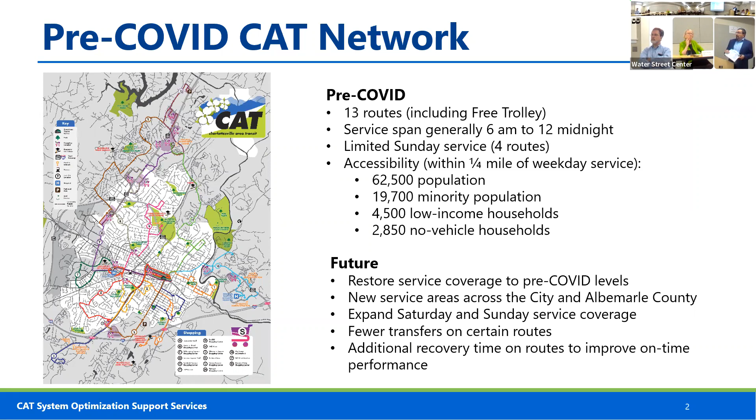So this kind of shows what that system optimization plan looked like, where we tried to improve service along the US 29 corridor, straighten some routes, make some routes more direct. We were proposing a new crosstown service and trying to beef up service on a number of corridors to 30 minutes or better, expand weekend service, and get some new service coverage, like some new areas in Albemarle County along Mill Creek Drive and into PVCC, as well as strengthened connections between UVA and the US 29 corridor. So that's kind of a high level of what the system optimization plan proposed.

Well, next we'll just kind of walk through the proposed phasing that we're looking at, since we can't do it all at once, but do it incrementally.

Sorry for the interruption, we had a comment that they're having a hard time hearing online, so we're moving the microphones closer. That's the mic, right. And I confirmed with B that they could see. I just want to make sure they could see. Can we put the AC on now?

I'm sorry, so does anyone have any questions? I just want to make sure as we go along that people don't have questions about what we're seeing right here, or are you going to go into more detail with the routes? Oh, you are.

That's good. And these are the same proposed network improvements that we saw 2 years ago. It's just we're talking about how to phase that. That is correct. But I'm having a hard time remembering, so we'll walk through it phase by phase and go through each round. Okay, that's great, thank you.

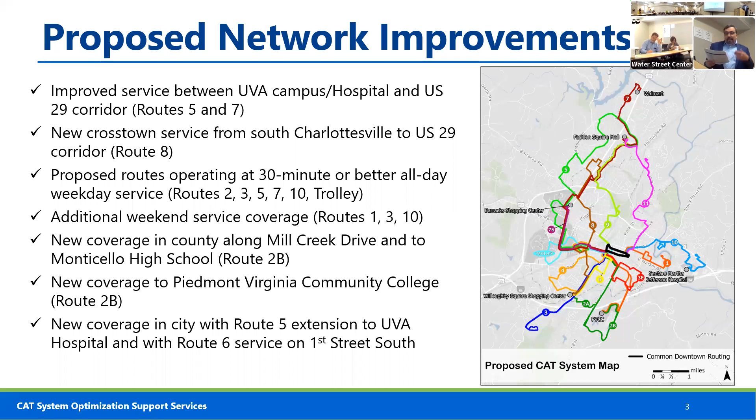Okay, so just on a system-wide basis here, next slide please.

The system optimization plan has had some modest gains in service coverage on weekdays and Saturdays, more so on Sundays. But what it was really accomplishing was improving accessibility at stops that had 30-minute or better service, getting that extra frequency so that service is more usable for riders there, as opposed to 60-minute routes.

I'll start with the phase 1 improvements, which we thought were the most pressing needs here. We're working with Garland and Joanne on this. For weekday and Saturday service, we were proposing to implement improvements on 3 routes: Route 11, to get service to the center on Rio Road; Route 6, to improve frequencies; and Route 2, to restructure service down at Avon Street. I'll talk through each of those individually.

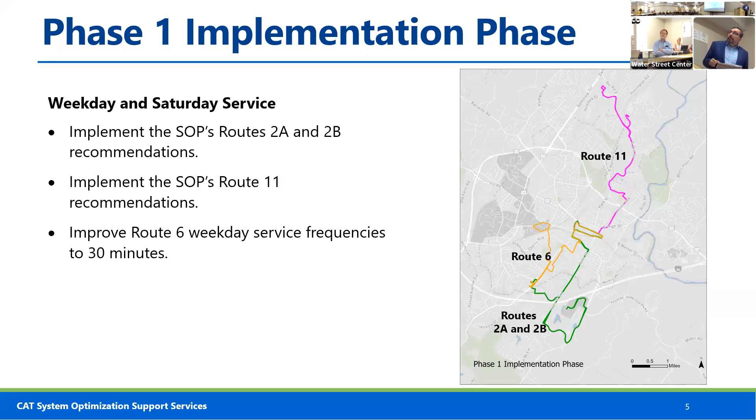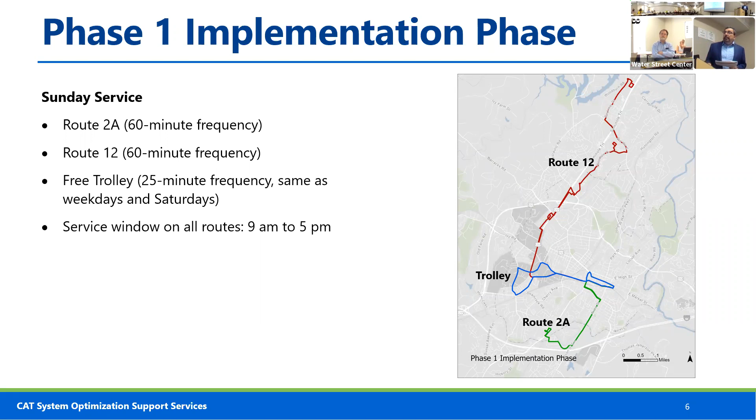Also, right now because of the pandemic and driver shortages, CAT is not able to run Sunday service. So we felt that was a pressing need to get some level of Sunday service back on the streets. We were proposing to get the trolley back online, the Route 12, which ran pre-pandemic on the US 29 corridor, and to get service down Avon Street past the CAT garage as well for Sunday service.

So a little bit about these 3 route improvements that are proposed.

For some of us that may not know exactly where the route numbers go... same old problem I have all the time. Just need—now that one clues me in because it says Willoughby Square. I just want to make sure people are aware of where the numbers actually go as we go through this.

Route 2 presently does a one-direction loop, a counterclockwise loop down 5th Street, back up Avon Street to downtown, cutting through the 5th Street station. What we propose is to make this 2-direction service, so it's more usable for people along Avon Street, and split the service with every other bus going either through 5th Street Station to Willoughby Square, or on down past the interstate along Mill Creek into PVCC. So two 60-minute patterns that combine to a 30-minute service along Avon Street.

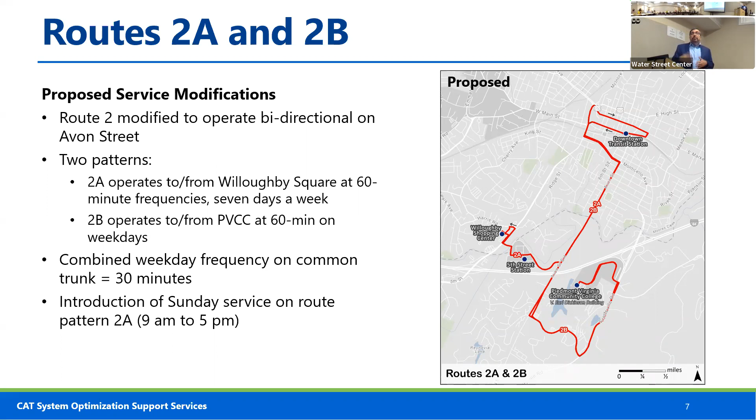That was one of the more pressing needs we wanted to make sure got included in phase 1. One of the major benefits is that going to PVCC allows us to get service to the high school. It's also helpful operationally for CAT because now you have 2-direction service on Avon Street going right by the facility, so when drivers are coming on to do an afternoon shift, they can catch the bus to do a relief here at the downtown transit center, improving their efficiency.

So that's one, and then the other big improvement was Route 11, which is really just a minor alignment adjustment. There's been a stated need to serve the center on Rio Road, so it's just getting that service to that center. To accommodate that, we had to take out a little loop along the alignment, but basically it's running like it is today, with that added service to Rio Road.

So if you guys have questions, please jump in. I just want to make sure, for the center—because I know Peter's been very concerned about the center—that southbound service still is not going to be possible. That's what I'm seeing there. That is correct.

That's one of his concerns. Now it's a safety issue, the buses not being able to turn left out—that's not a CAT issue, that's a safety concern. You can't go across an unsignalized intersection with 6 lanes of traffic. I was thinking about Peter since he's not here, because he's been very concerned about getting that service. And it wouldn't qualify for a traffic signal—according to VDOT, which is looking at this, it doesn't meet the warrants to allow for signalization because there are already 2 signals further down the line.

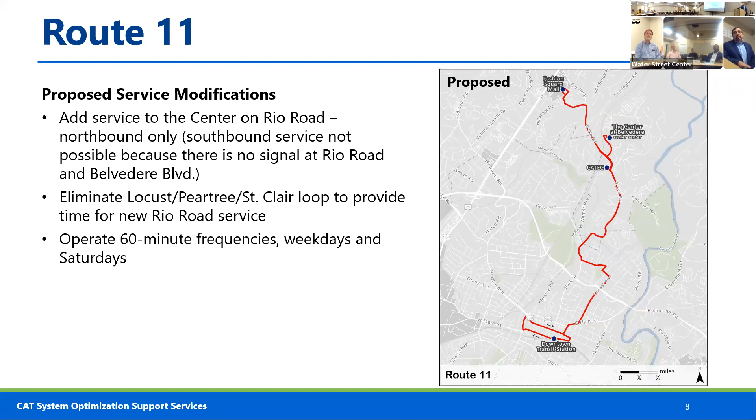There's one other improvement that's part of phase 1 that doesn't have an alignment change, so I didn't do a slide. That's Route 6, which goes from downtown to Willoughby Square by Crescent Hall. That route currently is at 60-minute frequencies, and we're proposing that as part of phase 1 it go to 30-minute frequencies as well. I know that's been a stated need for some time. So very modest improvements for phase 1 to accommodate — it's going to take time to build up the drivers and get some improvements going.

Phase 2 is looking at improving service along the US 29 corridor. Basically there are 2 route improvements proposed there, to Route 5 and Route 7. Let's go to the next slide and I can talk about each of them.

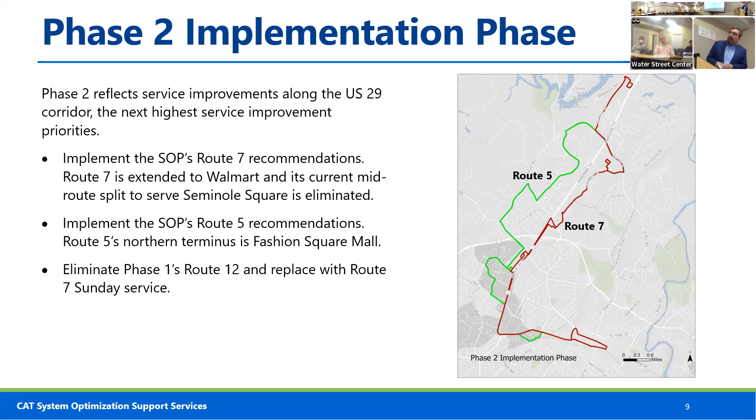Previously phase 2 was adding Sunday service, so this would be after you had Sunday service? Yeah, phase 1 included just 3 routes on Sunday. Okay, so this Route 5 would be after you do the Sunday service? Yes. Okay. Sorry, I'll get my numbers straight. That's a good point. I can't wait for this, so that's why this is my favorite one. Yeah, that's a good point about the Sunday service.

Because of the driver issue, we're proposing for phase 1 to start Sunday service just from 9 a.m. to 5 p.m. Then, as there's more driver availability, we'd expand that to more like a 16-hour, 17-hour day, with 2 shifts of drivers for each route.

Just to be clear, the first thing you'd do is the Route 6, Route 11 stuff. Then the next thing would be the Sunday daytime service. Yep, and then this is the next phase, phase 2, where there's a few routes being implemented. So timing-wise, it's probably phase 1, then 3 months later phase 2. Okay, 3 months in between, not 3 years. Assuming we can get the drivers there to make it happen — that's the goal. Just 3 routes for Sunday service to start off with.

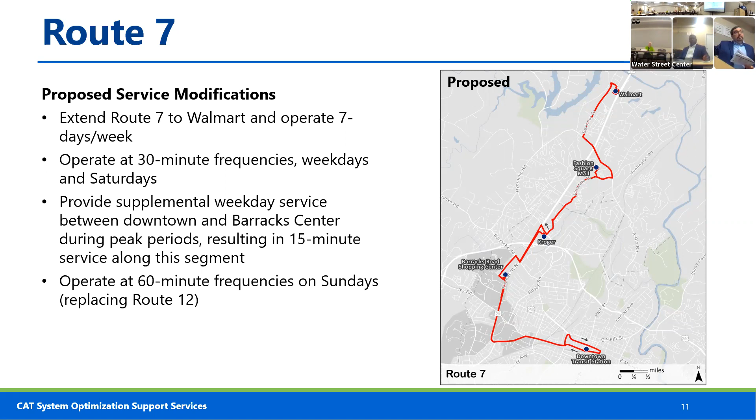So, yeah, Stonefield - that's currently served by Route 8 as well, so there'll still be service with that route. This one will be staying over on the side. Okay, if you can go back a slide.

So the other change in this quarter is Route 5. That would then just terminate at the northern end here at Fashion Square Mall. You can see there that it just stays on the west side of US 29, kind of serving along Commonwealth and Georgetown and such. But instead of just ending it at Barracks Road, we thought it'd be good to add some more coverage and extra service from Barracks down to UVA - so we're running it down to the UVA hospital. Trying to cover up my smile.

I agree, that's great - this is really good. So both for Route 7 and Route 5, on the directions that you'll be operating now that we weren't operating before - for example, southbound on Hillsdale, or whatever the name of that road is, or eastbound on Ivy, or southbound on Copley Road, where transit hasn't run before.

Do we need to speak about bus amenities on those? So we want you to identify locations. Yeah, you and I'll have a conversation first about where it makes sense, or whether you have already identified potential areas for us to stop.

Okay, there's a lot of construction right there at Ivy, in the public realm. So that's the UVA part, but I was just wondering also about southbound on Hillsdale - there may not be any transit amenities because transit doesn't run southbound on that road right now. So how do you get through all those negotiations and such?

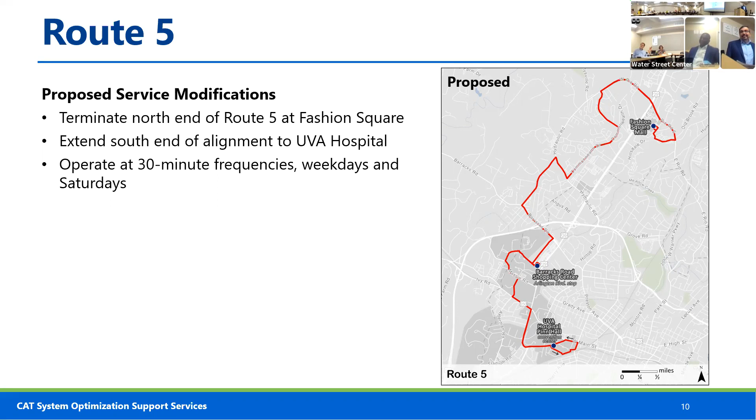That's, I think, another reason that for phase 2 there's so much work to do with stop locations there, that we need to be done before you can implement this. We'll get there, we'll get there soon.

So we get phase 1, and we'll have a conversation. Okay, so then phase 3 is really just the rest of the implementation of the system optimization plan here. I've got a number of slides that will go through a lot of these, but let me just say off the top, some generalities here. One of the things we do for the routes operating on Sunday in phase 3 is expand that span - instead of 9 to 5, it would be 7:30 to 10:30, so we'll have a longer span there on Sundays.

There's one route in the CAT system, Route 1, that currently does not operate on Saturdays. So we have that operating on Saturday in the system there. So all the routes will be operating on Saturdays. And then I think probably the rest I have maps for, so we can just go through this.

I'll go through each of them. The first thing, Route 3, it currently serves Fifth Street like you see, but there's also another piece to the east of downtown that's serving the Belmont neighborhood. When we looked at this a couple of years ago, most of the ridership is along Fifth Street. There's not a whole lot of ridership in the Belmont neighborhood. So we wanted to get more frequent service on this street here. So we have this at 30-minute frequencies, weekdays and Saturdays.

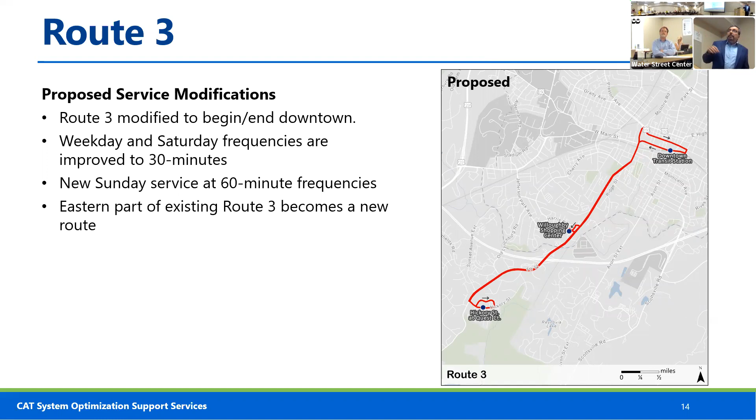We just broke out the 3 on the next slide. We just, for purpose of this, called it the 3 East, 3E, where that would stay at its 60-minute frequencies like it's doing today. So rather than having this, as far as allocating the resources, the buses, the bus hours, putting it more on Fifth Street and maintaining the service in this neighborhood - we want to make sure we didn't cut off any neighborhoods. So this is a way of making sure that we're getting more frequent service in the areas that need it, but also making sure any neighborhood that currently has service maintains it.

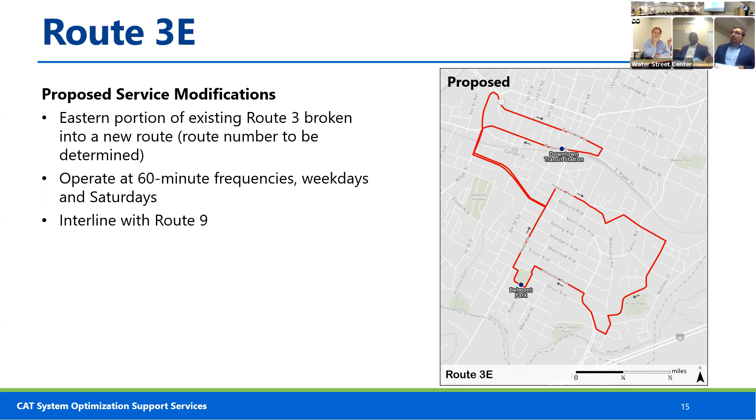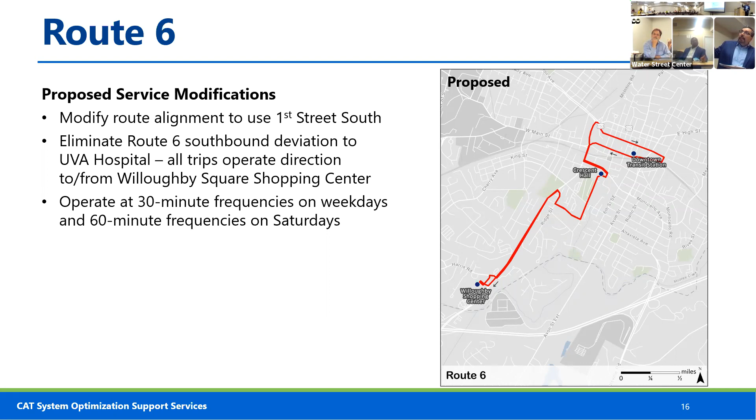The next one, this is Route 6. We improved the frequencies to make sure we're getting that extra service to Crescent Hall in phase 1. One of the things we're doing here is presently this route has a little mid-route deviation, if you will, up to UVA Hospital. So anyone just trying to get from Willoughby Square to downtown has to make that trip around the UVA Hospital. So we took that out of this route, and we proposed on the next slide putting it on this Route 8, where you can see it's starting at Willoughby Square, and it's picking up, going to UVA Hospital there, what that Route 6 was doing.

So we're still maintaining that service along that road up to the UVA Hospital. And the north end - why do we loop around? It's hitting the Shops at Stonefield. So folks that were going from Crescent Hall, if they were going to the hospital, they would want to transfer to get to the hospital. Or go downtown, and they'd be able to catch a lot of frequent service from downtown. What we do is get more frequent service quicker to Crescent Hall, which is part of one of my main goals, to get more service to that area. At least get a 30-minute, but eventually get to a 15-minute service. All that deviation we had wasn't allowing me to do that, so we needed to clean that up.

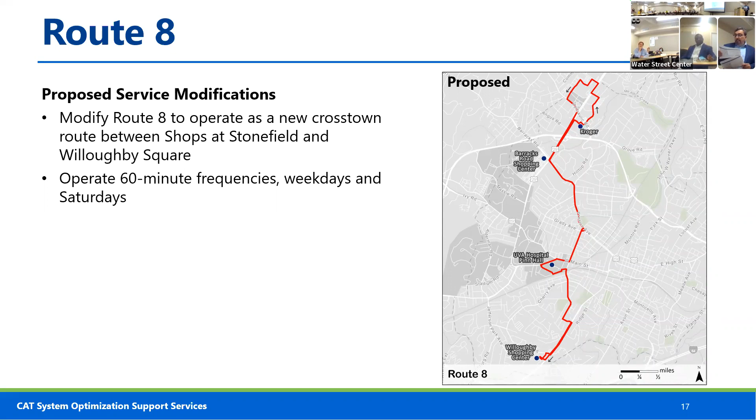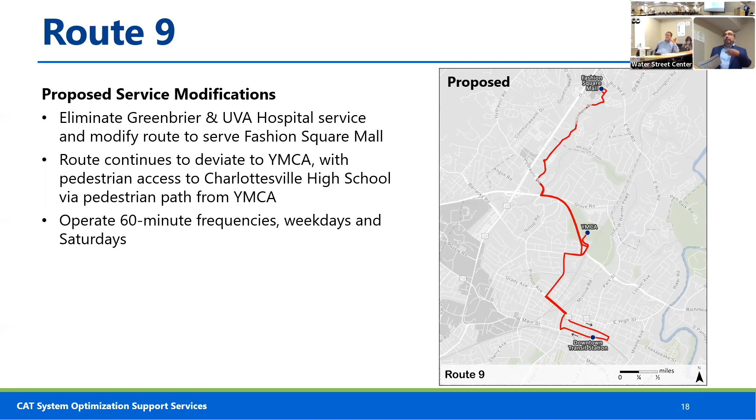Route 9 was, I think, probably CAT's lowest performing route pre-pandemic. So we really wanted to try to do something to make it more attractive for ridership there. It was serving downtown and the Y, and just circulating around the streets near the high school. What we proposed here is extending that up to Fashion Square Mall, where it'll have connections to Route 7. So someone along this route can get to the Walmart, get to Route 5, and get access to jobs, shopping, or whatever along the US 29 corridor.

And then Route 10, this one serves the Pantops area and the hospital. Right now it's very circuitous, it has some big loops. We try to take out the loops, but of course we want to maintain that service to Pantops. So we tried to straighten it out a bit there, if you will, and also improve the frequency. Right now it's operating at a 60-minute frequency. To me there's a lot of potential in this corridor, and we were also proposing that this should be a route that runs on Sunday, especially going to the hospital.

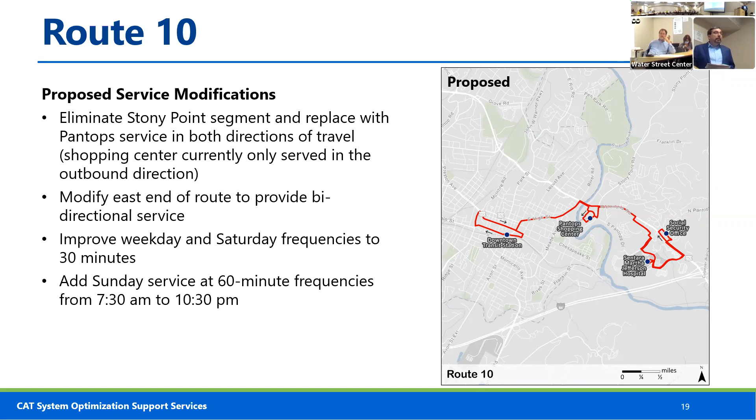Before I get into this, there are other improvements as well. I don't have a slide for this, but the trolley, which is right now operating every 25 minutes. Phase 3 also has it getting back to a 15-minute frequency, Mondays through Saturdays, with the long span till 11 o'clock at night.

So the last thing, what we call phase 3 plus. With phase 3, we still have some routes operating at 60-minute frequencies, which isn't great if you're trying to utilize transit. So we wanted to look at what this service could look like if every route operated at 30-minute frequencies or better, Mondays through Saturdays, and then even Sundays just during the daytime.

Phase 3 plus is every route operating 30 minutes or better, 6 a.m. to 6 p.m. All the routes also operating during the daytime at 30 minutes, and then not all the routes will be operating on Sundays, but those that do will also be operating at 30-minute frequencies on Sundays.

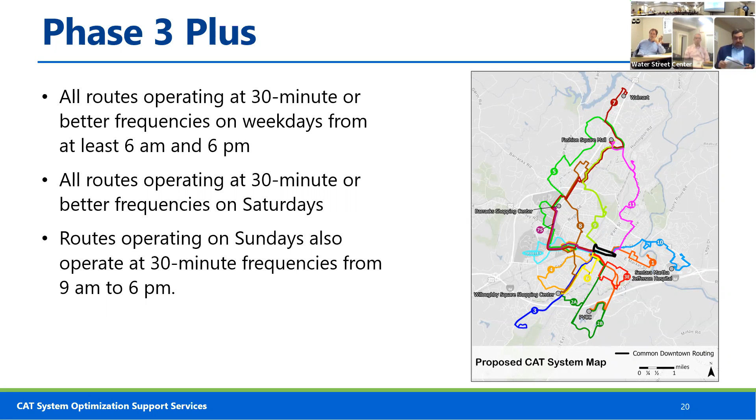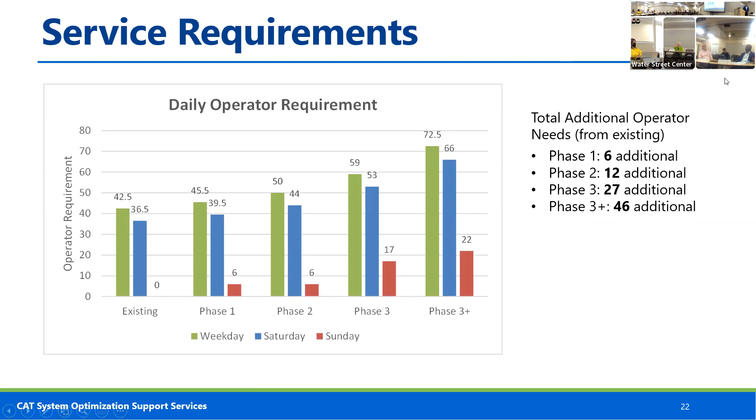Yes. Okay, then I have a question. I noticed on one of your earlier slides, and maybe we should go back so the folks that are zooming can see in case they have any questions. One of your earlier slides mentioned Mill Creek Drive at Monticello High School. And I just wanted to ask you, Garland, we talked about in the past, a stop for ACRJ, Albemarle Charlottesville Regional Jail.

Yeah, and I know we were talking about how expensive it was. Is there anything in that, between Mill Creek Drive there and Monticello High School, is there anywhere it goes that people could actually use to get to the jail if they needed to? So if we implement the service on Route 2A, we're going to go right out the jail.

Okay, so the question then becomes having a conversation with the jail or with the county about a location that would be suitable for allowing us to put in a stop. Well, it would be a conversation with the county and the city, because it's an Albemarle Charlottesville Regional Jail. But anyway, it goes by the jail, right out of jail, so we may be able to in the future figure something out.

Yeah, that's an easy solve. As soon as we get the service in, then we would figure out a proper place to actually put a stop. Yeah, it is kind of a shame that folks can't access transit to visit family in the jail. And part of what we designed this was taking into account that we also would have service 7 days a week. So it's not just a Monday through Friday endeavor, because people do come to the jail or need to go to other places on that corridor 7 days a week.

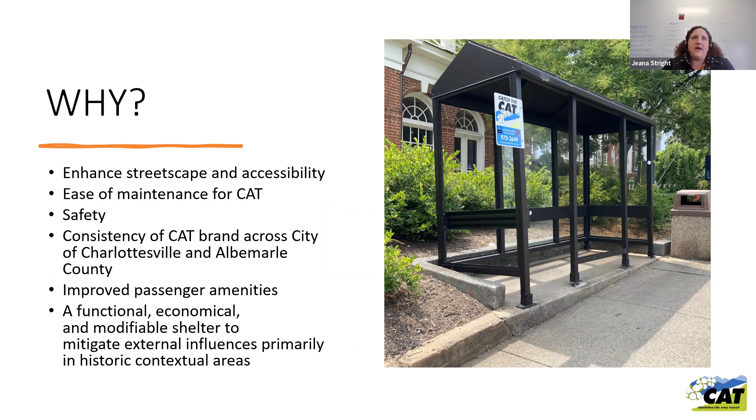Right now there are a bunch of different kinds of shelters throughout Charlottesville, in various states of repair. So we want to make sure we're looking at safety considerations, ease of maintenance, so that whatever we put in is able to be maintained over time, making sure we're looking at the consistency of the transit brand across Charlottesville and Albemarle County, looking at what passengers are expecting from their transit providers, and making sure the shelters are functional and look at contextual influences as well.

So I mentioned we had started a process. The process began with a visioning session with stakeholder involvement. We went through and looked at a bunch of different photographs of shelters across multiple systems all over the country, and voted on them based on whether they were safe, practical, and exciting. We took that feedback from all the different things people liked about the shelters, along with a bunch of written items, and generated 3 concepts. So right now we're presenting those 3 concepts to this committee as part of a stakeholder outreach to get your feedback so we can refine those concepts.

So when we started looking at the overall national scale of shelters, we also looked around Charlottesville and Albemarle County to make sure we were looking at both the historic context and the modern context, and how these shelter designs could translate between both different kinds of contextual points around the area.

Option 1 was developed from some architectural cues from the Downtown Transfer Station. It's got some of the patterning, the feeling of materiality, and especially the distinct column shape and roof shape. Those would harken back to the downtown transfer station and remind people of the consistency of the brand.

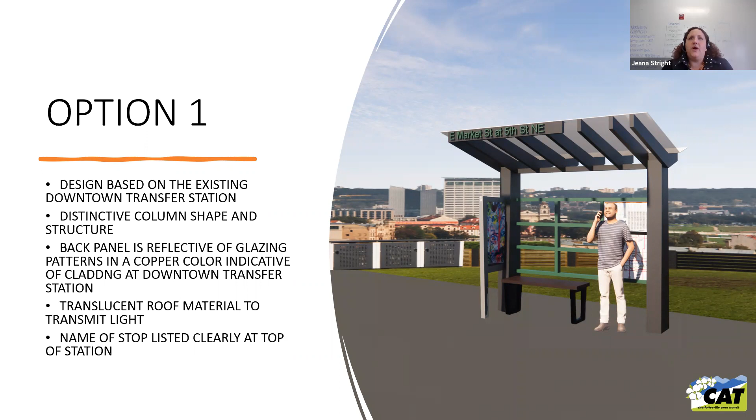The back panel would also be reflective of some of the glazing patterns in the windows and represents that aged copper color. We're looking at translucency in roofs, a theme you'll see throughout most of these shelter designs, to help allow light into the shelter and make sure the shelters are open. We have a couple of amenities, which we'll get to later, and some thoughts about how to incorporate local art into the shelter as well. We also want to make sure the stop is clearly identified on the shelter, so you'll understand where you are in the overall context of the system.

Option 3 feels a little bit more substantial than the other options. It has a heavier, masonry kind of feel to it. It's going more towards some of the historic elements of downtown Charlottesville, especially, and it does have a contrast with some modern elements in the overhead roof glazing plane.

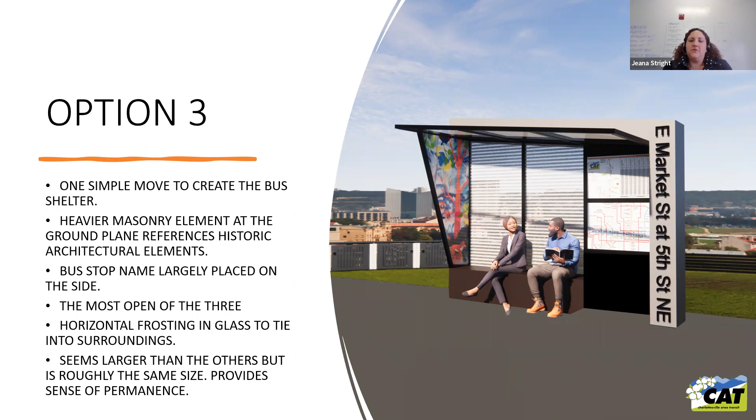It also looks at translucency on the back panel, and the stop name in this scenario is also very large, so you're really understanding it—it almost becomes part of a different kind of iconography as we identify where those stops are located. It's the most open feeling of all three and feels the largest, even though all three stops are within the same size parameters.

So when we look at amenities and how to draw riders in, we've got a couple different things we were looking at. Bus information is foremost, the most important. If you don't know where you're going, you don't feel comfortable taking the bus. It's one of the biggest obstacles for transit riders—the fear of the unknown, that they don't know where the route goes, where to get off, or when it's coming.

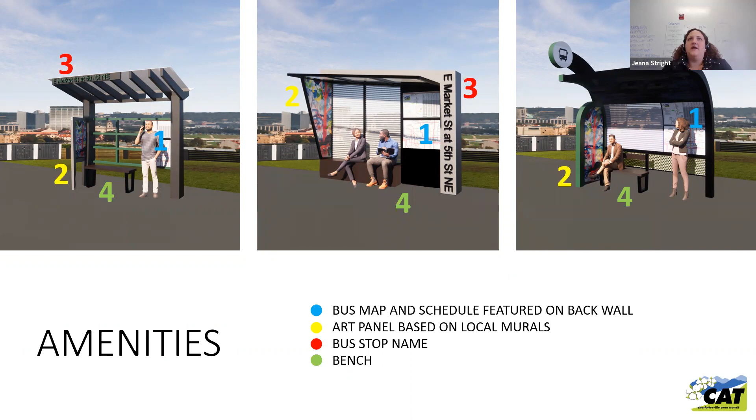Scalability is really important as well. So we were looking at the ability for higher frequency locations to grow while still being in the same style of structure, so they can respond to their surrounding environment and be coordinated with other routes that might stop there as well. We'd be looking at three different sizes: small, medium, and large. This graphic represents, at a high level, how a shelter could be scaled, with possibly multiple benches as part of that shelter depending on the scale.

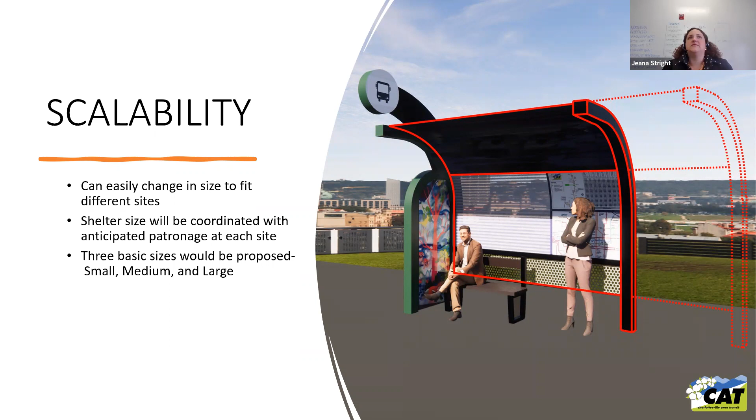And then lastly, maintainability—we talked about that a little bit before. If you can't maintain a shelter, it's not any good, because we all know the public is hard on different kinds of amenities. Hopefully, the more integrated it is into the streetscape and public involvement, especially with some of the art panels, the more ownership the public might feel of it. But that doesn't mean it's going to last forever with no maintenance. So we really were looking at modularity of components, easy to replace parts, and the ability to update information as the system continues to evolve.

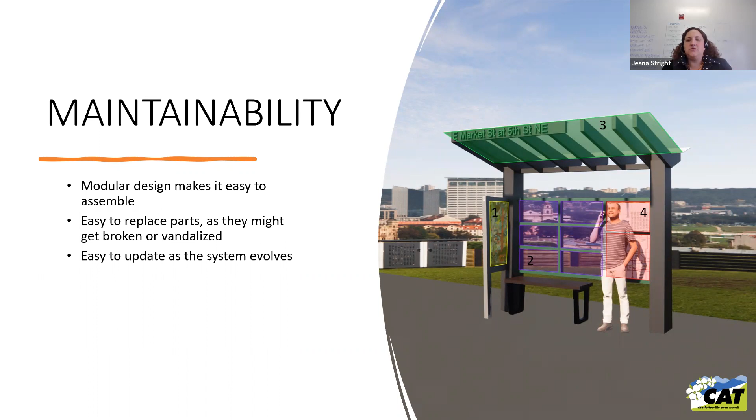And so that's kind of where the project is right now. We are looking at how to make this an implementable project, so we can start small with some pilot test projects and get more of a larger scale implementation as the project moves forward.

And this would not be for every single stop—these would be in special locations. We do have an off-the-shelf model that we're going to use, but this would be in higher frequency areas where we want to give some character to a particular stop.

That's my first question: what triggers a no shelter, small shelter, medium, or large shelter? What triggers it and how? Like if you have 300 stops, how many are triggering this signature treatment?

So part of why we were desperately trying to get the second piece, trying to get the APCs, is because they actually give us real data about how people are using our existing stops. So we'd have a baseline to tell us we already have like 20% or 30% of our stops that we'd consider to be higher frequency routes. We'd probably scale those towards a medium or larger size, and for others where we wanted to particularly highlight a neighborhood or shopping center, we'd do similar, but on a smaller scale.